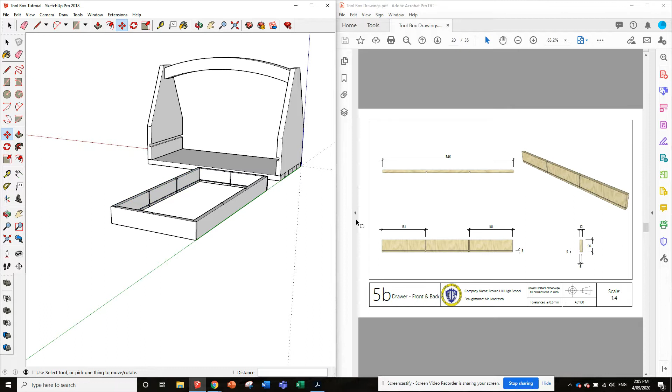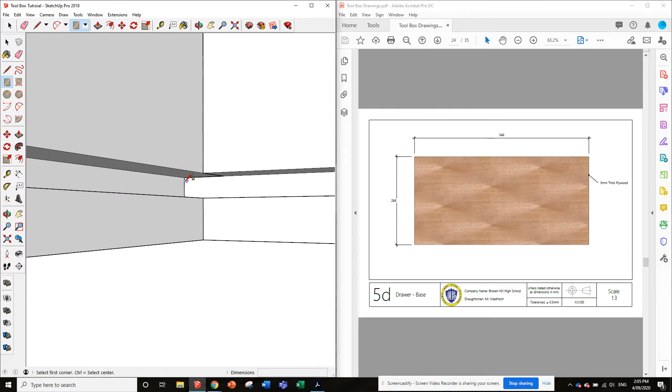So let's find the base. That's here, a piece of 266 wide and 546 long, 3mm thick plywood. I reckon the easiest way to go about this is to get a rectangle, because the plywood's going to fit straight into these grooves, from corner to corner. So if we draw a rectangle from that point, orbit up around and look over into the other end, you can see we've got 266 by 3.

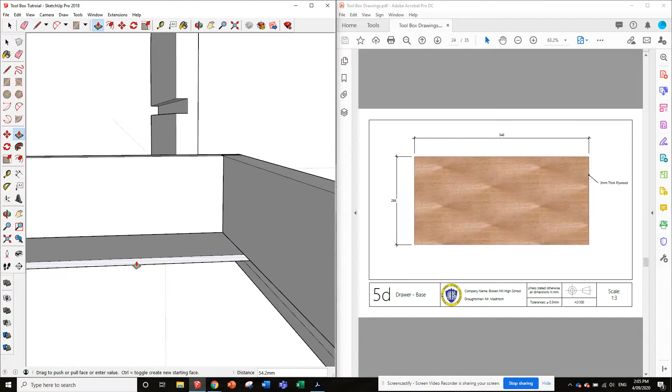So we do that, and then we've got a rectangle we can grab with the push-pull tool, push it out this way, 5, 4, 6, enter, and we've got that base perfectly fitting in there. I'll triple click on it, make it a component, 5d, that's good. That's looking good.

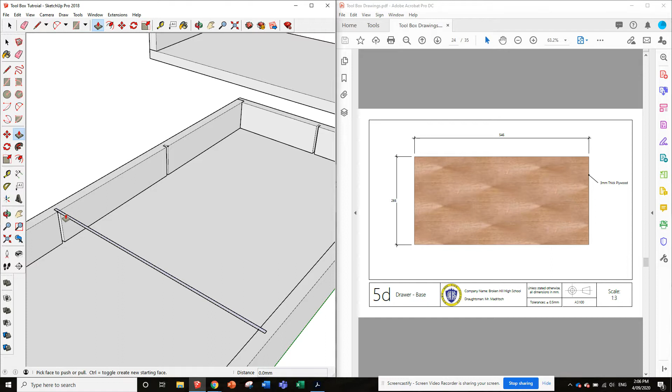Now the dividers should be pretty simple. We should be able to just click here and then click here, same over here. Actually, we'll just do this one and copy it across. So we've got a rectangle, push it down to the base, triple click on that, make component, create. Then we'll copy that with the move tool, press Control over here, like that, and we've got that piece in.

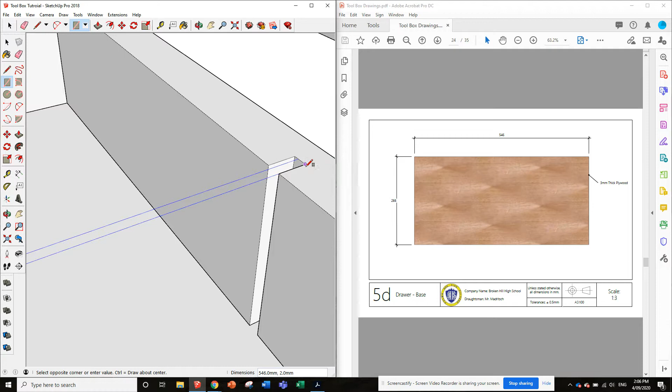Now, exact same with the long piece over here to over here. Oh, hang on, got a bit of a problem here, something is a little bit off. Let's see, what was our dimension here? 137 in, and that piece is 278.

Oh, you know what I reckon might have happened? I reckon because we've just copied this one across, that might have had to be 137.5 to be perfectly in the middle, not 137 exactly. That's why we're a millimeter off. So that's okay, what we'll do is...

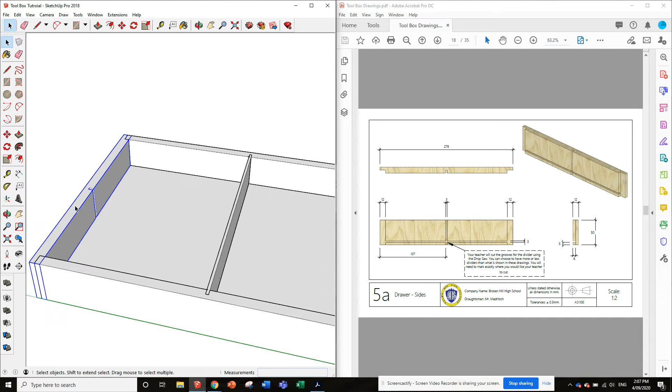We'll right click on this one, make it unique, and double click on this to edit the component. Firstly, we'll get it out of the way, move it along the green direction, 100 mil, get it out of the way. Then let's fill this back in. We'll go on here, close it up, and close it up, rub out those lines and forget we were over there.

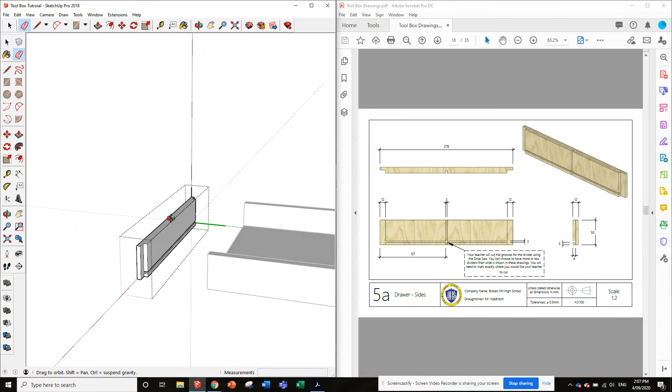Now, because it's still lined up on the green axis, we can grab a tape measure, go from this corner all the way across on the green axis to here. I can then grab the rectangle tool, go here, and do a 3 by 6 rectangle like that, and push it down the same way we did before. Then it should all line up.

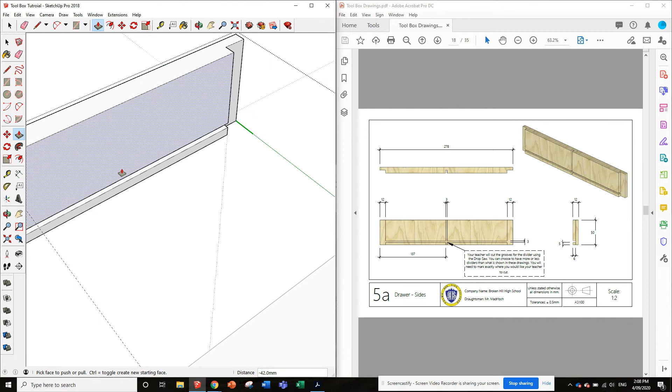All right, now we've got to do this annoying thing again. We draw the straight lines down to the bottom, grab the eraser, push this one in, erase that. Okay, now we're looking good, hopefully that has fixed our problem.

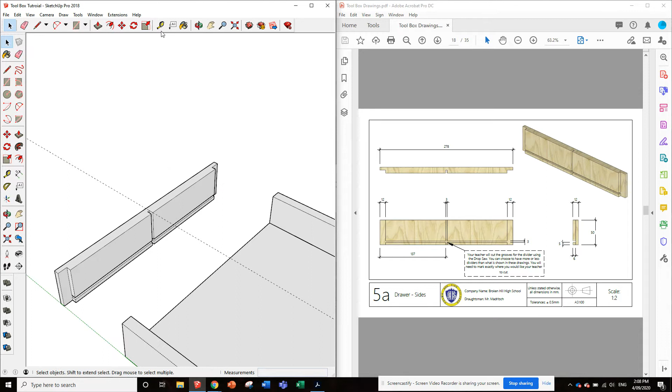Yeah, and I reckon that whole problem was just because a 3 mil gap in the middle of that probably wasn't exactly, was it 137? It was probably 137.5. But you know, in the workshop, that 0.5 of a mil wouldn't really make a difference.

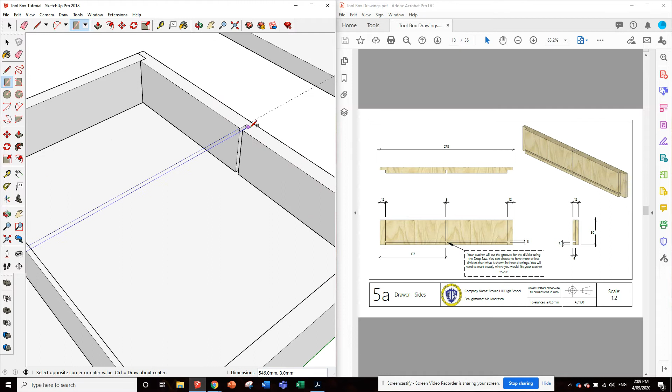So now I reckon we can go click. Yeah, look at that, perfect. And then we go to here, 42 mil, triple click on it, right click, make component, and call that divider long. Now, if I look at the drawing for the divider long, we can see that we've got to take out 2 notches here and here that go 21 millimeters down.

And I would say it's 21 millimeters because it's half of the width of the plywood, because that's 42. So yeah, 21 millimeters down because of that.

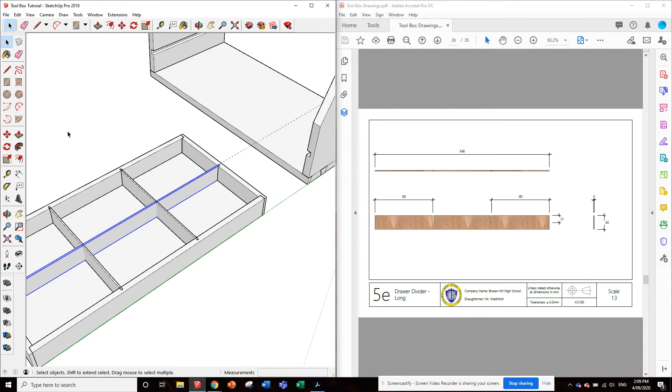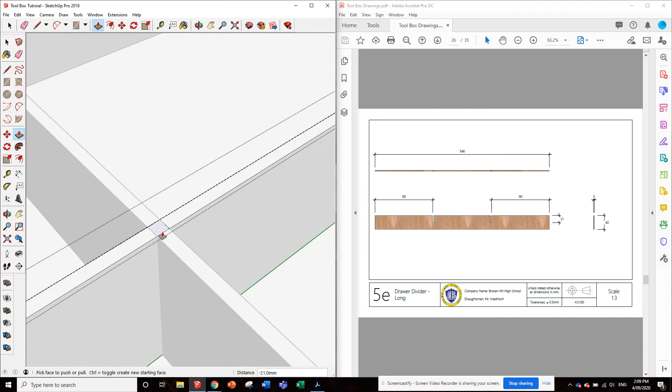So all we do is double click on this, super easy. We will go dot to dot, dot to dot, same over here, dot to dot, dot to dot. And then we'll push down this little rectangle 21 millimeters, enter. Then this little square, 21 millimeters.

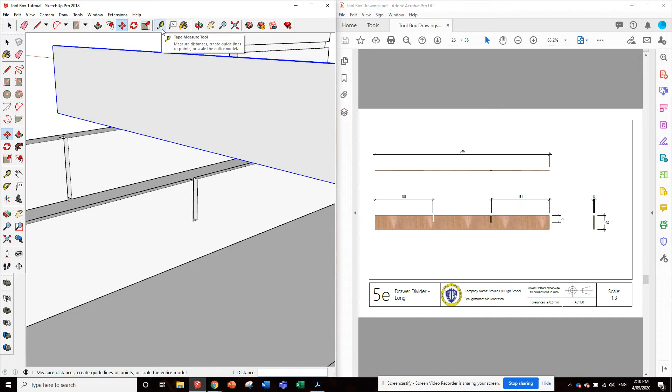Okay, perfect. Now, if we lift this up, straight up on the blue axis, we should be able to now remove a little chunk out the bottom for it to slot in there. So to do that, the easiest way will probably be to move it up a fair bit higher so we can actually look underneath.

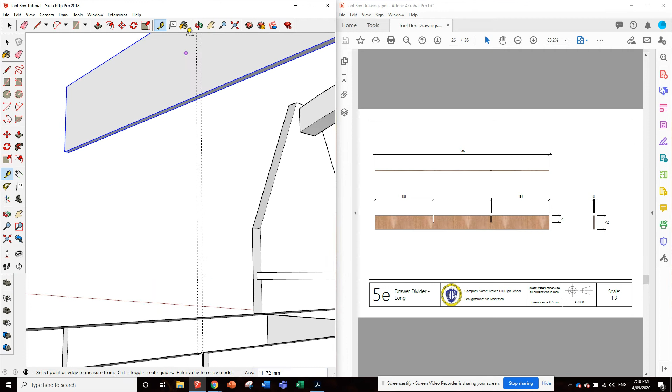And then I reckon we will put some tape measure lines on it, one here and one here, right? So we've just gone from that point and that point straight up. Now I reckon we can look underneath, double click, draw those two lines across like that, and push it up 21 millimeters. Now, because that one's a copy of that other short divider, which should already be done, we should be able to just move this one straight back down into its spot.

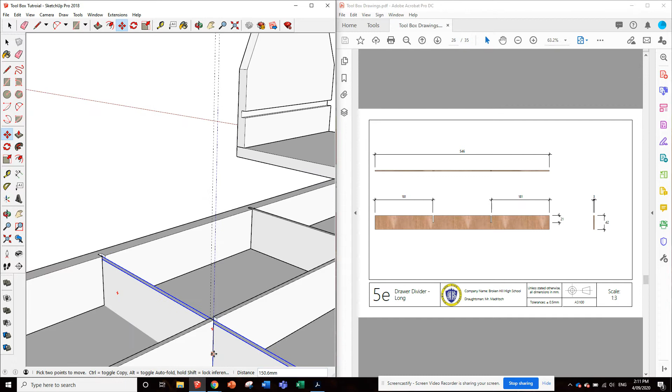Okay, happy days. That's the drawer dividers done. Let's just get rid of those guides.

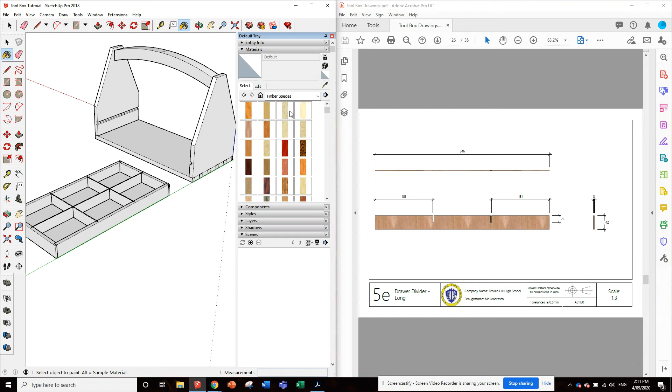Now, we don't really have to do this, but let's quickly paint it so it starts looking more like a toolbox. I've got some fancy timber species downloaded, but you can just use the ones in that wood folder. I might use these downloaded ones to make it look a bit fancy. Let's go with some beech. Why not? Beech is nice. We'll paint all the bits that are timber, that are pine, with that.

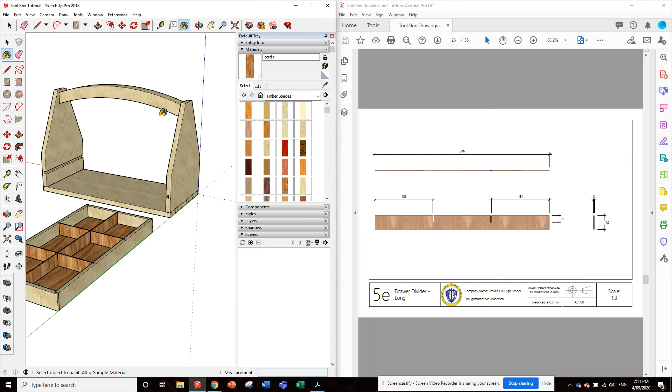And then the stuff that is plywood, we'll do a different color. Maybe this one, that looks pretty nice. Pretty fancy. Okay, cool, that's done now. What we're going to do is take this whole drawer and make it a group.

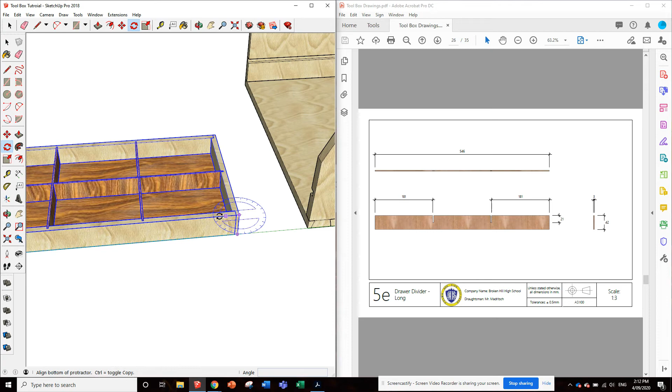So we just need to orbit around and highlight the whole thing like that. Right click, make group. Now whenever we move it, it's all going to move together. First thing we'll do is rotate it 90 degrees, so on the blue axis there, rotate it around 90 degrees.

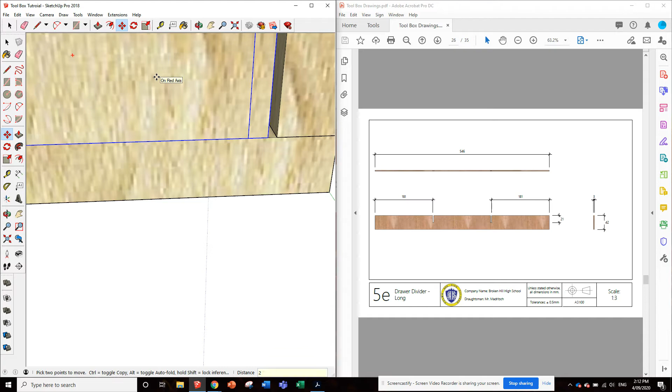Then we can grab the bottom corner here, put it up there, and we'll see we've got a little bit of a gap. Maybe 2 mil, 4 mil? So we're just going to grab the whole thing and move it across 2 mil. Now it'll be centered, so we've got a 2 mil gap there and a 2 mil gap there. There's a little bit of a gap of 1 millimeter at the back, that's fine, we'll leave it like that.

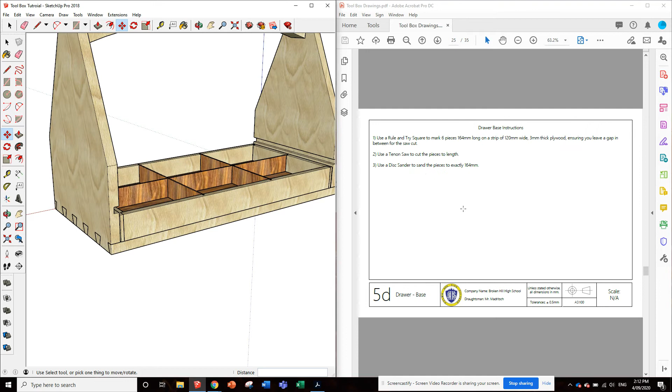Okay, so this is the side where we're going to be putting our false front because it's flush with the front. So the false front, where's that drawing? It's 12 millimeter plywood, I know that. Here we go, false front, and it's 65 millimeters wide and 600 millimeters long.

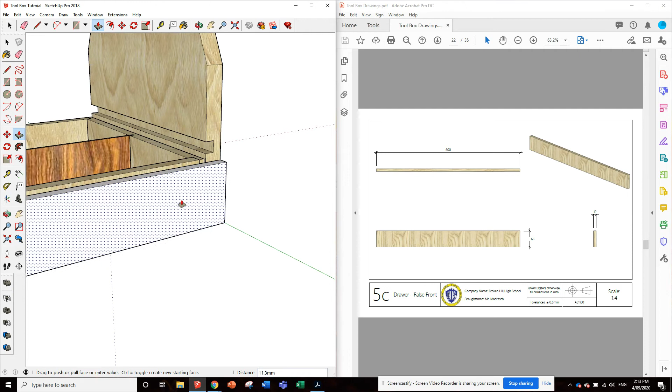So to do that, we could basically just draw a rectangle from here all the way to here, because we can see we're 600 long. So we'll type in 600, comma, 65, enter. Then we'll grab the push-pull tool, click, and bring it out 12 millimeters. Okay, so there's the false front. We'll triple click on that, right click, make component, and call it false front.

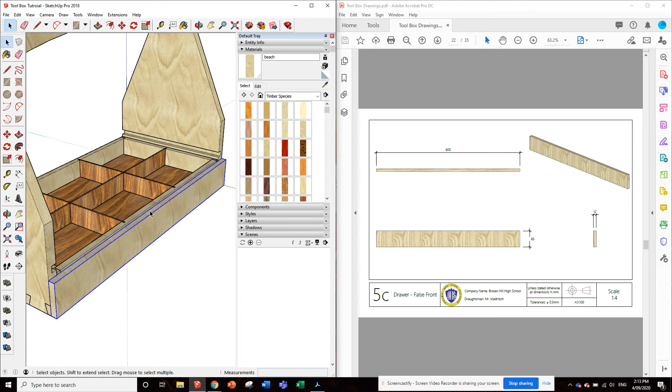And then I'll hold down shift, click on the drawer, and paint it first, so I've got that looking like, what do we choose, beech. There we go, very nice. I'll click on that one, hold down shift, select that, right click, make group. So now they're all together.

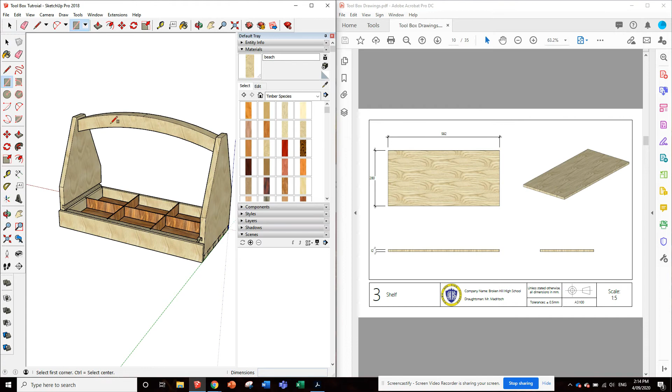Okay, now the shelf, I guess we could put that in, work our way up. Where's that shelf? I don't think we really need the dimensions for this because the shelf is just going to be a 12 mil piece of ply that goes from housing joint to housing joint. So we'll grab the rectangle tool and go from that corner there all the way around to this corner here, and then grab the push-pull tool and push it all the way across.

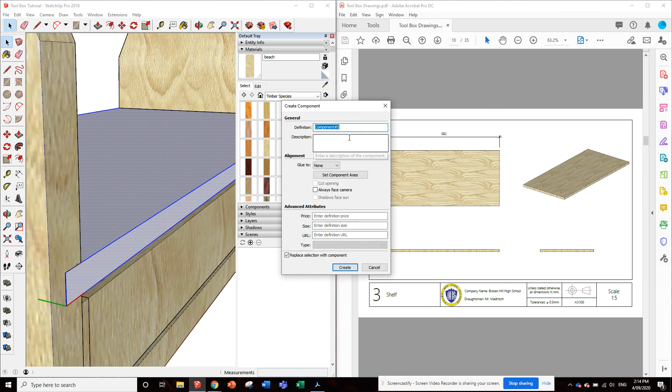And then I'll triple click on it, make it a component, and call it shelf. Create, there we go. Paint it while we're here. Look at that, looks very nice.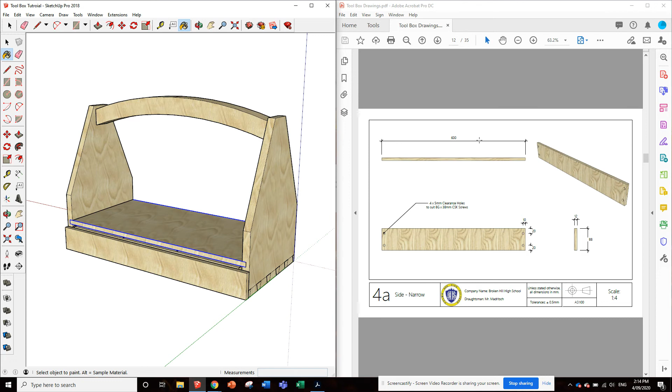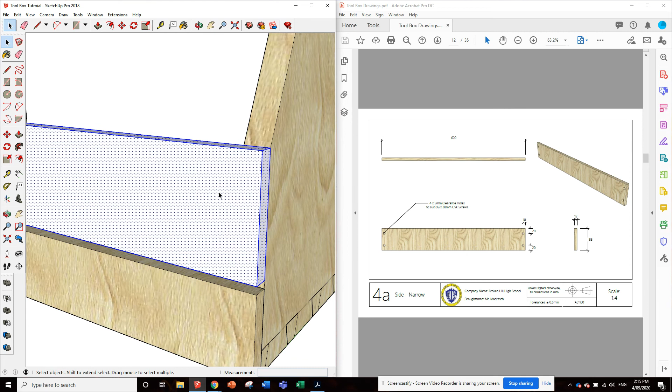Okay, now I think the only two things left to do are the narrow side, right? The narrow side like this, which is a piece that is 600 long, 88 millimeters wide. So again, we'll grab the rectangle tool, go from this spot all the way over here, and type in 600, 88, like that, and push it forward 12 millimeters. We'll triple click, right click, make component, create.

And then the other one, what do we got? Side wide, how wide is that? 160 millimeters, so that should be the width from top to bottom. I reckon if we measure that, there, 159. All right, so we've just gone a little bit over.

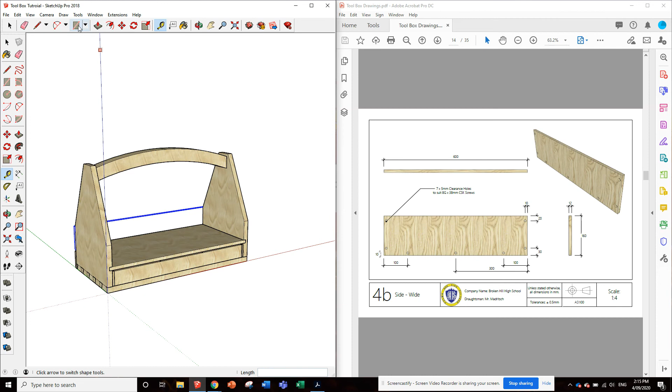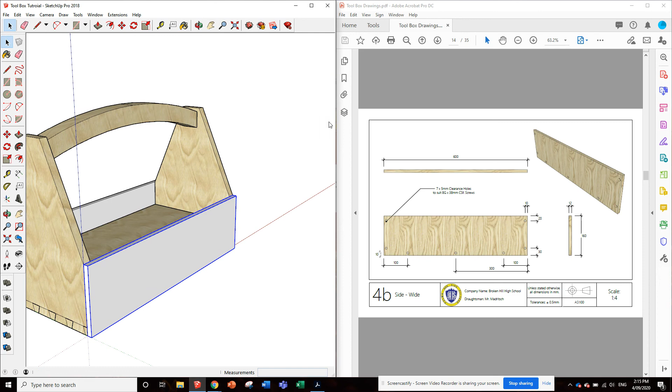So we'll go from the bottom corner, from here, over this way, 600, 160. Push it out by 12 millimeters. Click, right click, make component, side wide, paint them both with this, and then we've got our finished toolbox, right? Look at that, pretty good.

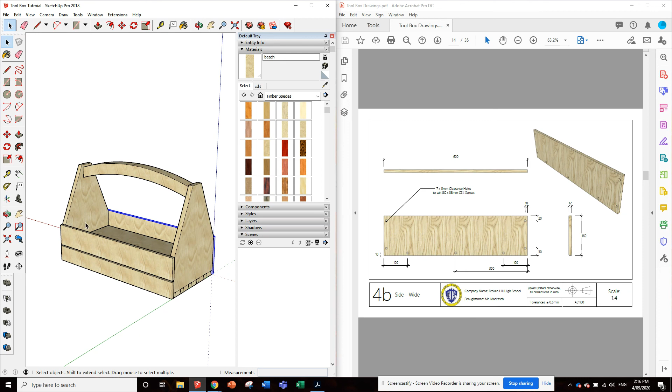There is one thing we can do. This is not super necessary, you don't really need to draw this on, but see how I've got the little screw holes, where you put your clearance hole and countersink for your screws. You can put them in, it's a little bit of a hassle. Maybe I'll do that in the next video, I'll just make a quick video on that. But for now, that's the toolbox basically done.

And then after that video where I show you how to do the screws, we'll look at moving it into LayOut, because there's a fair few things we have to do for that. Okay, happy days, good work.